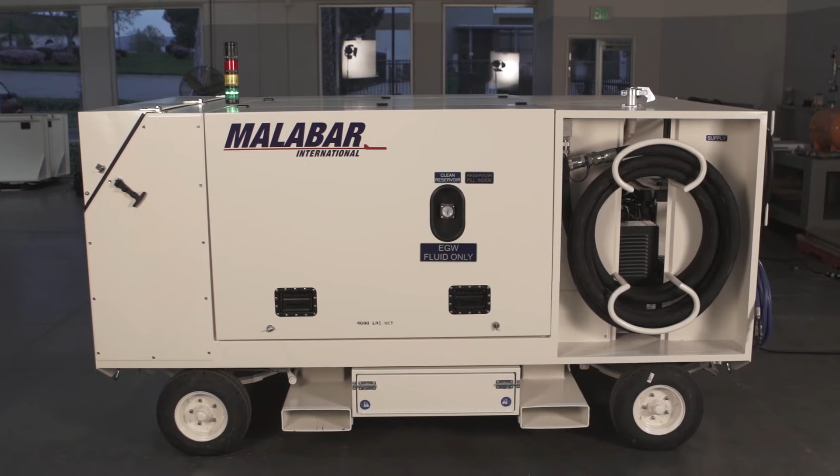My name is Lauren Card, Vice President of Sales and Customer Service. I'm here to present our operation, maintenance, and calibration training class for our Malabar coolant service cart for a 787 aircraft. The cart has various salient features and operating specifications that I'm going to briefly go through as a preamble

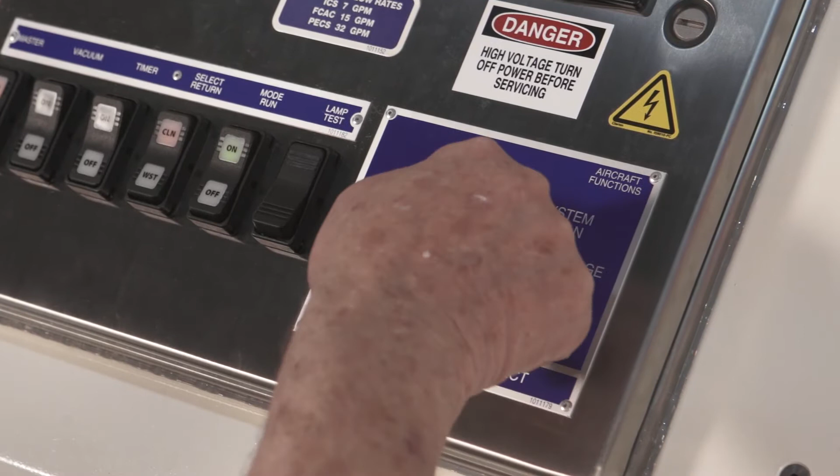to the course. The unit has an operating weight of approximately 4,600 pounds when it is fully serviced with coolant. The fluid that it uses is Boeing BMS 3-42 propylene glycol solution that includes an orange dye so you can see the visible fluid. The rated flow on the cart is up to 30 gallons a minute, and it's controlled with a variable control on the front of the cart, and we'll discuss that in a little while.

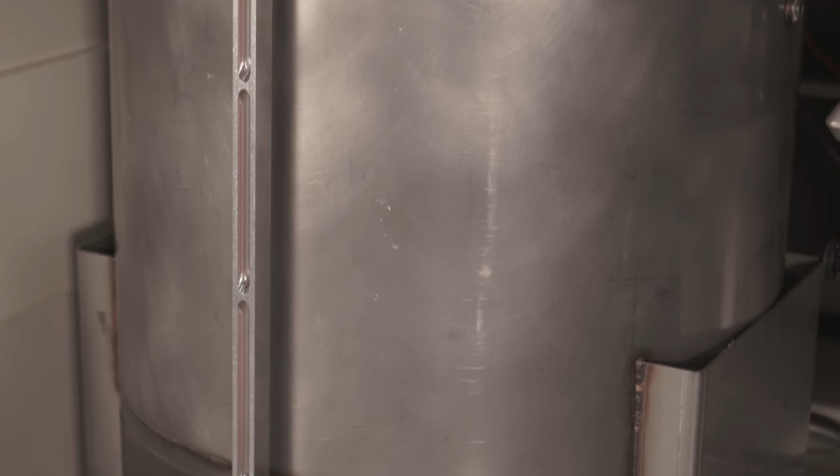The unit has an output pressure of up to 225 psi with a safety shutdown pressure of 230 psi. The unit has clean and waste reservoirs of 50 gallons each, and that is adequate enough to service the whole aircraft, which includes the power electronics cooling system, and also the integrated cooling system or ICS system, and the forward cargo air cooling system. It has supply and return filters to filter the fluid coming out to the aircraft and returning. The outlet is 3 micron absolute, and the return filter is 10 micron absolute.

The unit uses nitrogen as a source supply for purging the aircraft. After about 5,000 to 6,000 hours of operation, it's necessary to possibly purge the airplane, and we use low pressure nitrogen from a standard nitrogen bottle when that requirement occurs. Again, that's about 5,000 to 6,000 hours of operation.

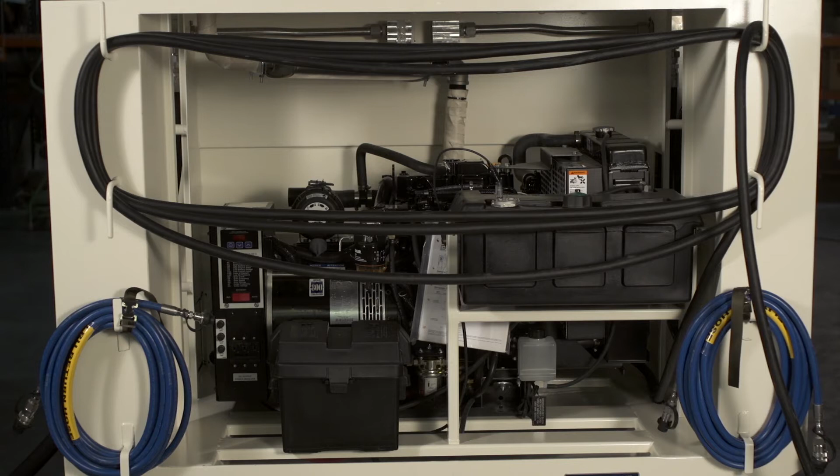The onboard generator provides electric power where you don't have shore power, say you're out on the ramp. The diesel generator has an 8-gallon fuel tank and is adequate for several hours of operation. The unit operates at down to minus 40 degrees Fahrenheit up to 130 degrees Fahrenheit.

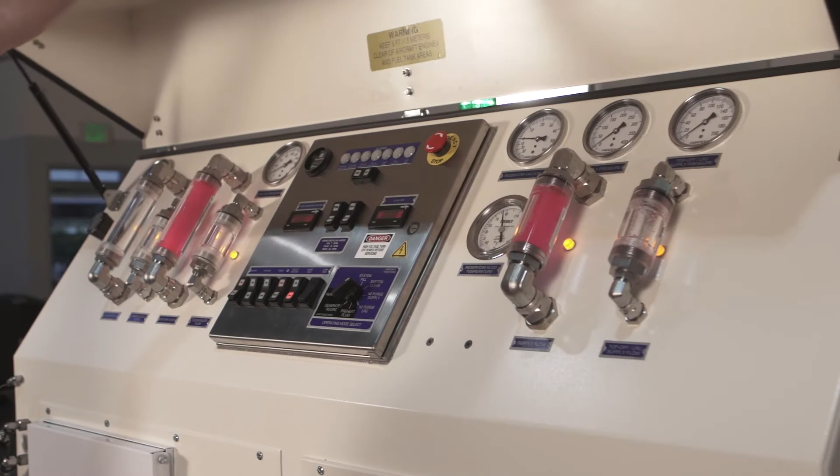Cart operators need to familiarize themselves with some of the possible safety hazards involved in operating the cart. One of them is a shock hazard. Because we're using high voltage electric power, you need to familiarize yourself with the safety features of the power panel. Make sure that you don't open the power panel with power on. You need to be aware of the plug on the end of the cable for plugging into the shore power, and the power generated from the diesel generator, again also high voltage 3-phase power.

Before performing any work on the cart, it's necessary that you turn off the power before you do any maintenance on the electrical system. The propylene glycol fluid itself could be considered hazardous. However, it is non-toxic, and it's something you want to avoid trying to ingest. There is a compressed gas issue because you're using high pressure nitrogen from a nitrogen bottle. So you want to be aware of the hazards involved with using high pressure nitrogen. It's necessary to have a static grounding reel and cable when the cart is operating on the aircraft to make sure that you bond the aircraft to the cart.

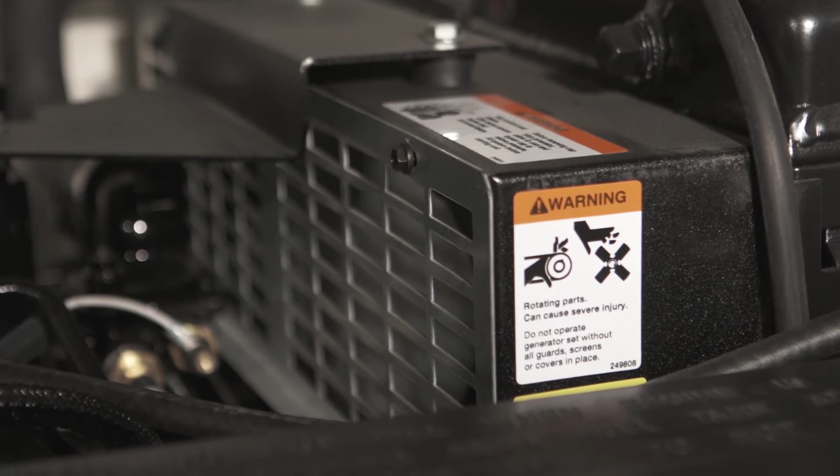There is a rotating equipment hazard because it does have a motor and pump system, although it is inside the cart. During operation of that equipment, of course, you can't access that, but you want to be careful with the connection between the motor and pump. Again, there's the pressure hazard from the fluid. Relatively low pressure, but be aware that you're using relatively medium pressure in servicing the aircraft. Again, up to around 225 psi.

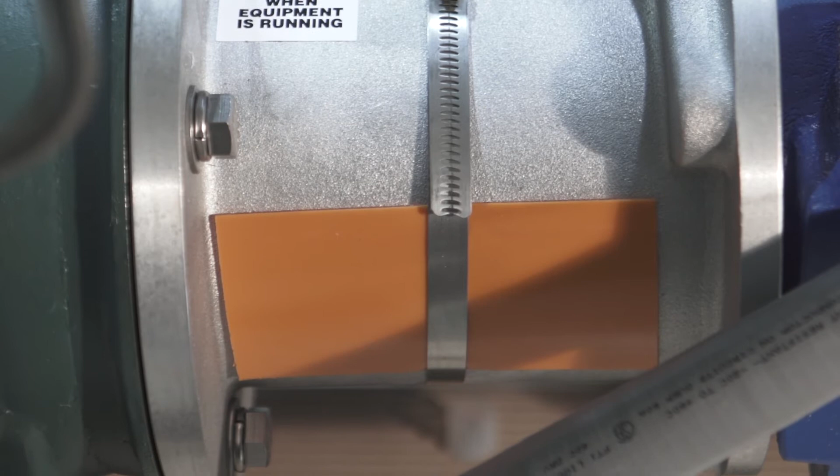There are various safety devices and guards to assist in keeping yourself away from hazardous areas. One of them is the coupling guard that's on the motor and pump. The other one is the fan guard that's on the diesel generator set. There's also a battery cover for starting the generator. There is the electrical disconnect switch that's on the power box in the front of the cart. There is an instrument panel latch, and also there's a pressure switch which you have access to in a maintenance type function.

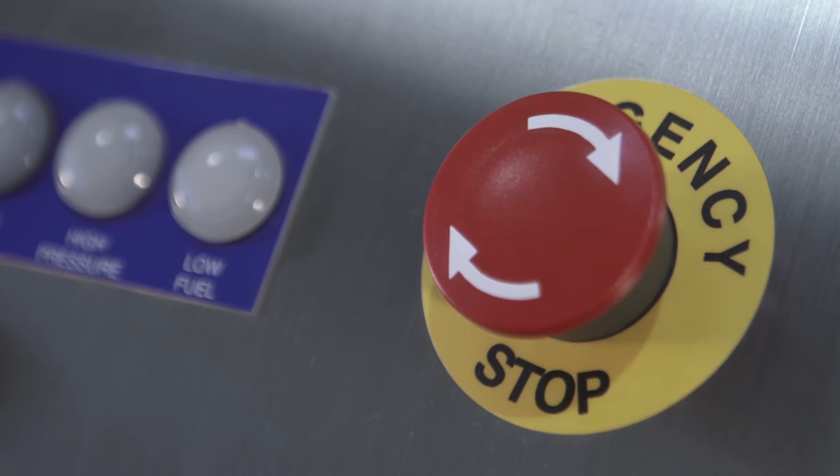There's also an emergency stop push button that is also on the panel in case there's an event so that you can immediately shut down the cart. Finally, there are relief valves in case you do have a pressure switch that malfunctions or any other system component malfunction. There are relief valves to protect the system, of course, as well as the aircraft. There are various warning labels that are fixed to the cart as a reminder of those areas that you should be aware of when you're working on the cart, especially in a maintenance function.

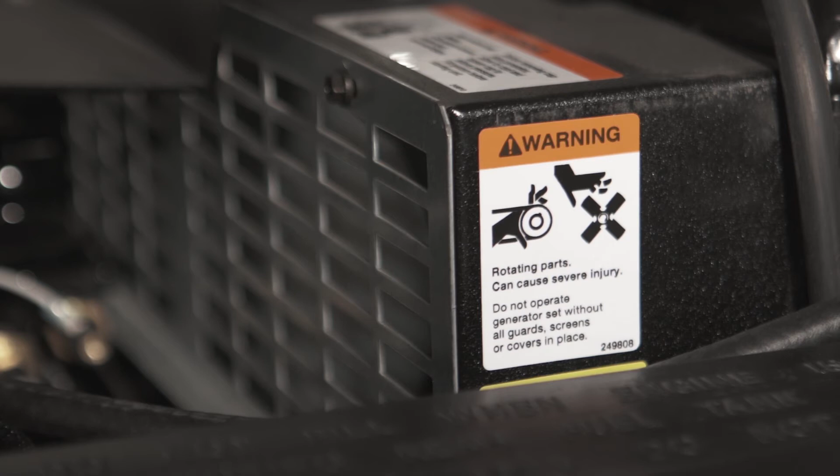Those include your electric hazard warning labels, which are on the front of the cart. There's also a warning label which is in the enclosure with the access panel open to keep the aircraft approximately 5 feet away from the cart, out of the envelope of the aircraft. Primary reason, of course, is the aircraft has fuel aboard and you need to keep the cart 5 feet out of that envelope due to the possible hazards involved with fuel.

Lastly, the generator, of course, has various warning labels, including hot gases from the exhaust, electrical power, of course, and rotating machinery, the fan, and the battery enclosure.

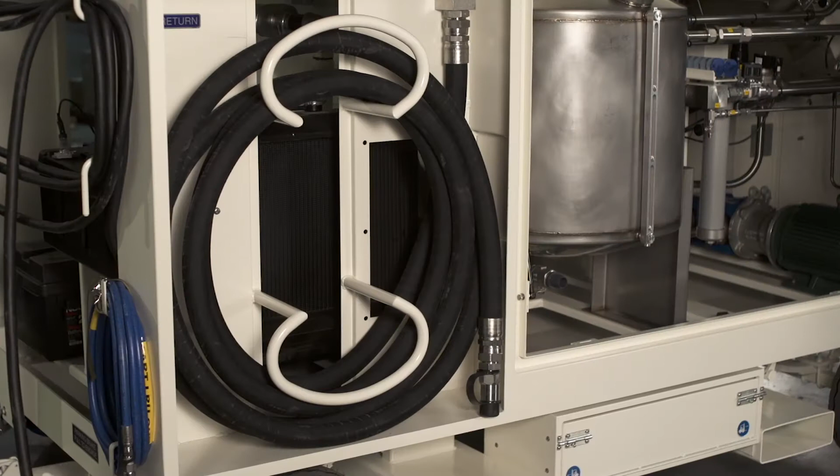Next, we want to talk about the system of operation on the cart and the various control features that are included in the cart. The cart is designed to fill, clean, deaerate, bleed, and evacuate the aircraft when it's time to change the fluid. The CSC cart is designed to fill, clean, deaerate, recirculate, and preheat the coolant fluid that's to be used on the 787. The various components are used in the cart to control these various functions.

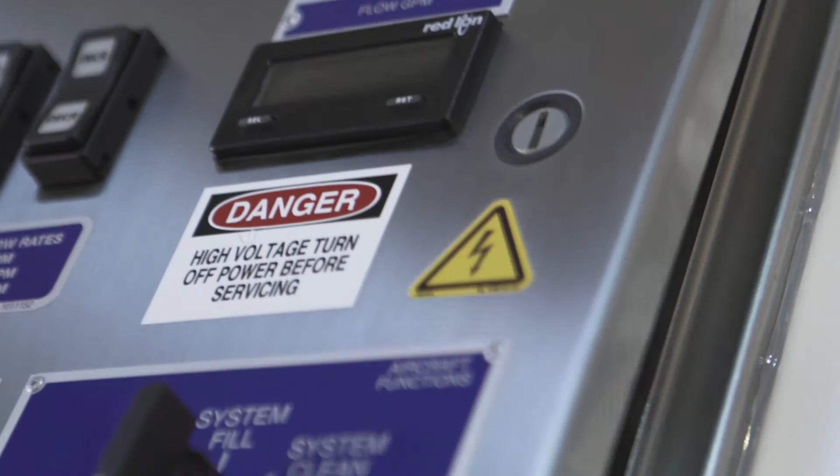The control panel provides the primary operator interface for the cart. Located at the rear of the cart, it has the electrical controls and displays mounted on the hinged door of the main control enclosure that houses a PLC, control relays, interconnection terminal blocks, and a low ambient temperature sensing and heating system for the electronics. The control enclosure is located in the center section of the panel.

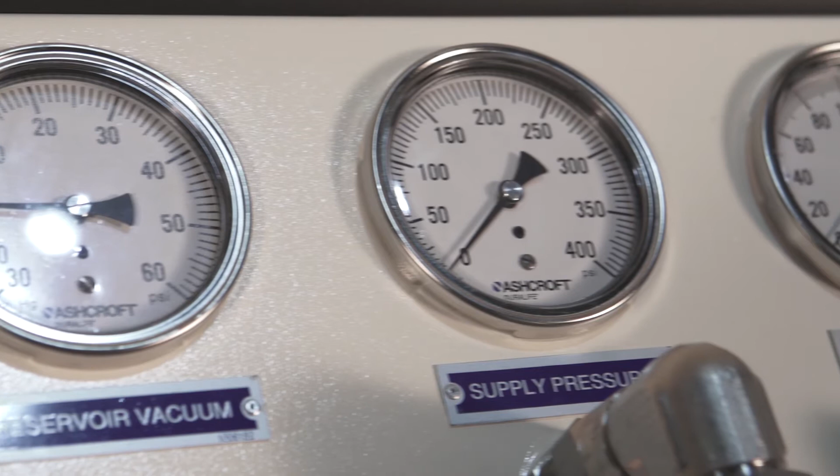Located on either side of the control enclosure are illuminated sight glasses for monitoring fluid aeration and purge, drain status, nitrogen regulator, fluid fill and purge control valve, and various vacuum, pressure, temperature, and flow meters.

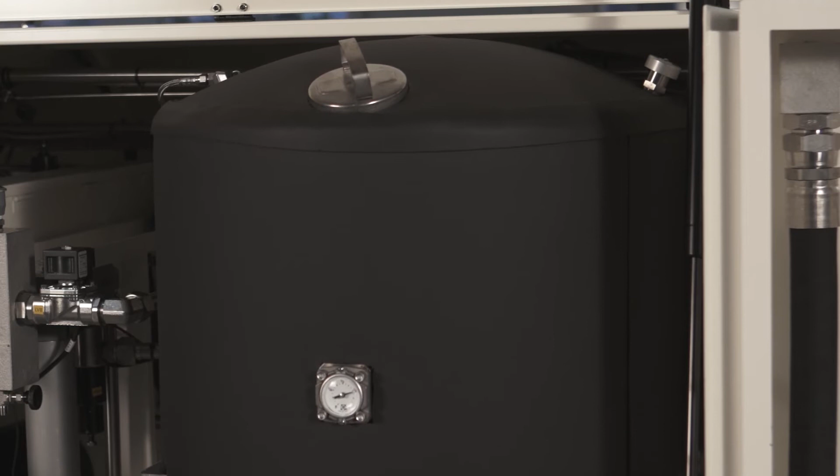The clean reservoir has a 50-gallon usable capacity and a stainless steel cylindrical tank equipped with a level gauge, Rochester type, a fill port and strainer cap, a drain valve, a pump suction isolation valve, a temperature sensor, vacuum and pressure relief valves, as well as a thermal blanket to keep the fluid warm and for storage, of course, of clean fluid.

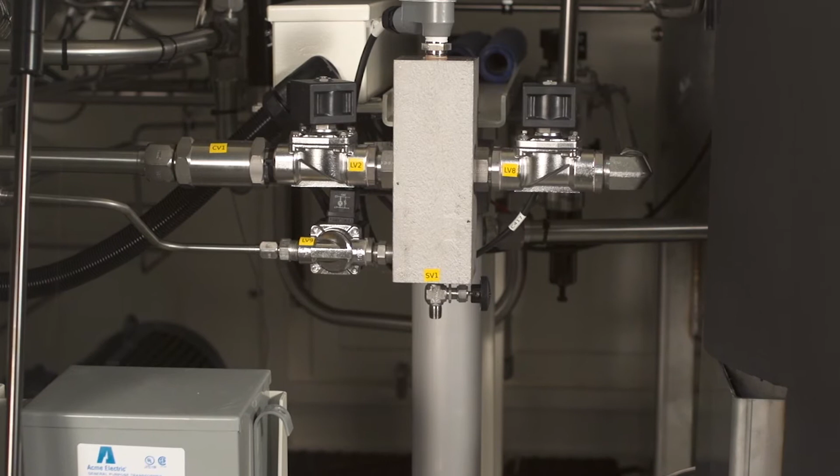The unit includes a supply filter and valve assemblies, which is on the supply side of the cart. It's a manifold system with a filter and valves on the pressure side with a fluid circuit designed to minimize fluid connections and piping. There's a 3-micron absolute non-bypass type filter with a differential pressure switch in the supply line downstream of the pump. All directional valves have stainless steel bodies, Viton seals, and are 24-volt DC solenoid operated. In addition, there's a solenoid valve in the manifold block labeled SV1 for sampling.

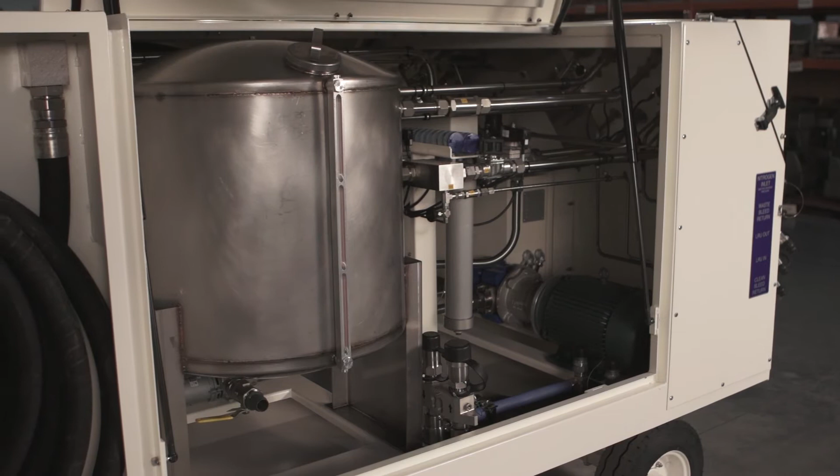The waste reservoir is a 50-gallon usable capacity stainless steel tank equipped with a level gauge, a fill port, strainer cap, drain valve, and center breather, which is provided for collection of fluid purge from the aircraft systems. The vacuum pump system consists of a 24-volt DC motor-driven vacuum pump, a trap, and a muffler with a vacuum regulator. These are provided to apply a vacuum to the reservoir for deaerating the fluid, preset at 3 inches of mercury.

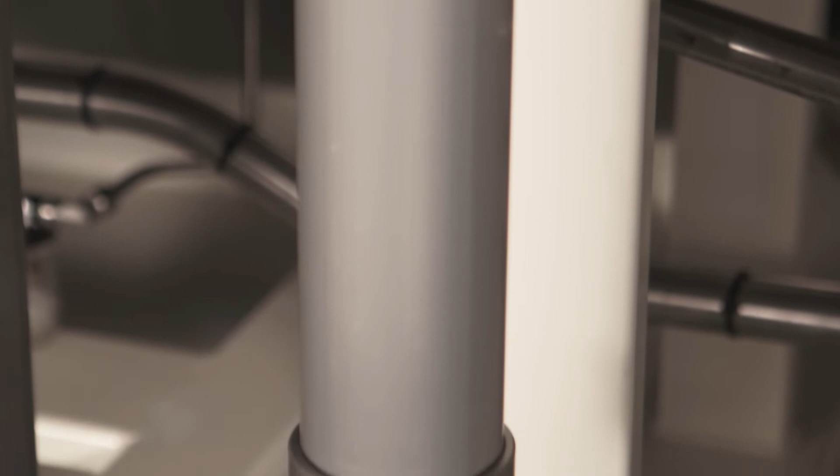The return filter and valve assemblies are manifolded on the return side of the fluid circuit, which are designed to minimize fluid connections and piping. There is a 10-micron absolute non-bypass type filter with a differential pressure switch in the return line. All directional valves have stainless steel bodies, Viton seals, and are 24-volt DC solenoid operated. There's also a sampling valve, SV2, for sampling the fluid returning from the aircraft.

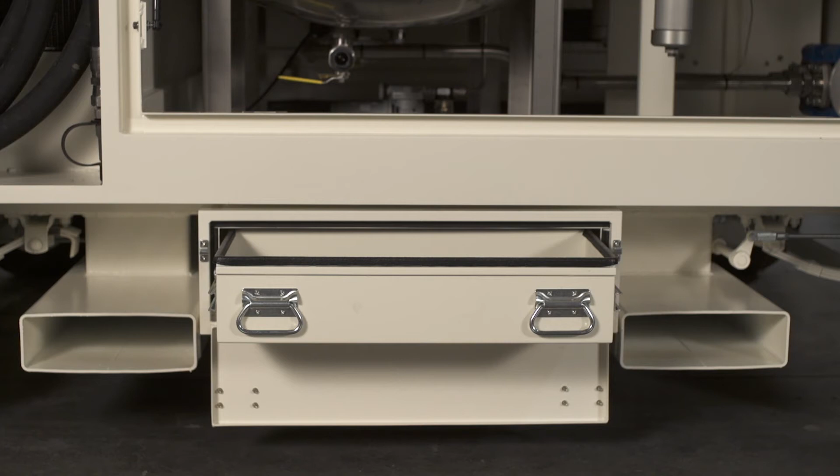A two-stage internal crescent-type gear pump is close coupled to a 10 horsepower, 208 to 240 volt, three-phase, 60 hertz motor. It's a NEMA C-face motor, totally enclosed, fan-cooled. There are two accessory storage boxes located underneath the main enclosure between the forklift pockets. The storage boxes provide storage for all the necessary adapter fittings, bleed hose, and accessories for interfacing the cart to the aircraft.

Supply and return hose assemblies include each a 30-foot long synthetic rubber-covered conductive hose with flush-type couplers and nipples installed at each end. The return hose includes a QD nipple, and the supply hose includes a QD coupling. This permits coupling of the supply hose to the return hose to allow operation in a runaround mode to precondition the cart fluid or flush the cart system.

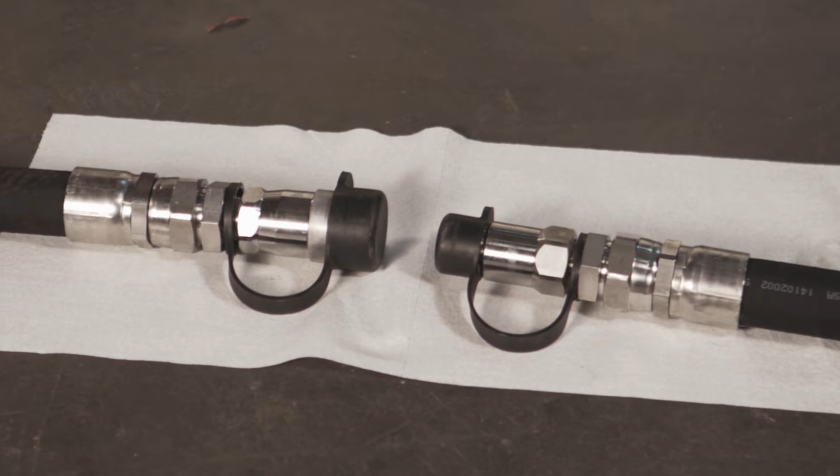Model 1011A has a diesel generator set for self-contained operation. The generator includes an 8-gallon fuel tank located just above the engine. The fuel gauge is located in the top of the tank. The unit includes top-off LRU, which stands for Line Replaceable Unit, supply and return hose assemblies.

These are 30-foot long, 3/8 synthetic covered conductive hoses with Parker flush face couplers and nipples. There is a supply and return hose, and they are located as shown in the front of the cart next to the tow bar.

There is a 100-foot cable. The rack is located just above the generator and is designed to store the cable, and mates with a facility power receptacle. The receptacle is provided by the customer. The static ground rail is used to bond the cart to the aircraft grounding system during servicing.

The coolant service cart is designed to service various cooling systems on the Boeing 787 aircraft. The system circulates BMS 3-42 coolant through the systems, filters it, deaerates it, and drains it. The cart can also be used to service individual aircraft system LRUs.

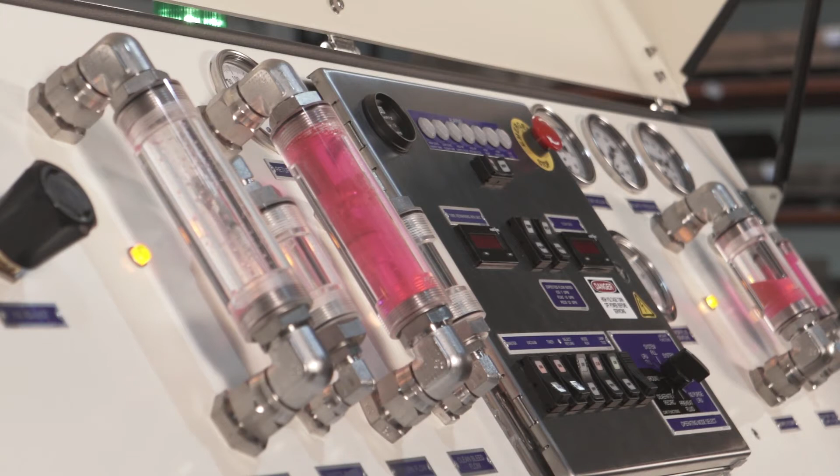The CSC unit uses a two-stage internal gear pump driven by a 10-horsepower electric motor to circulate coolant through the cart and the aircraft cooling systems. The unit is powered by a line cord or a water-cooled diesel generator. The pump draws coolant from a 50-gallon clean reservoir and sends it through a 3-micron supply filter.

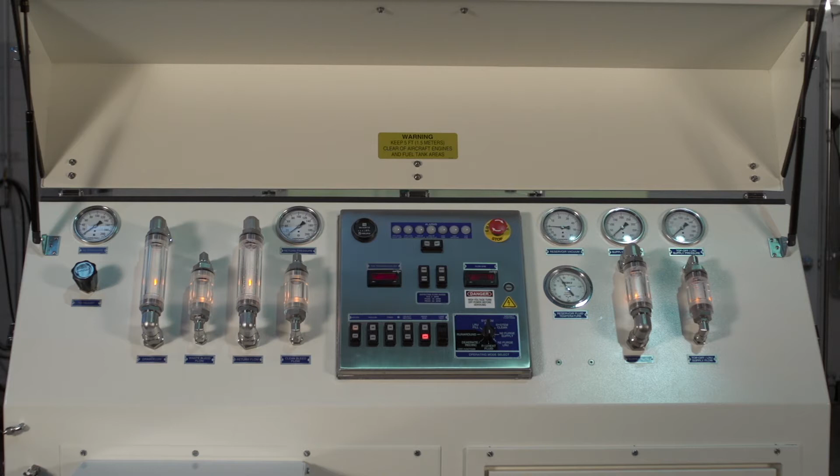From the filter, the coolant flow is directed by a selection of solenoid valves based on the aircraft subsystem being serviced and/or cart mode of operation: through a flow meter, sight glass, and main supply hose to the aircraft or return hose in the runaround mode, or through LRU sight glasses, LRU supply hose, through a recirculate solenoid valve to the return line, or the pump relief valve in a preheat mode bypassing the filter.

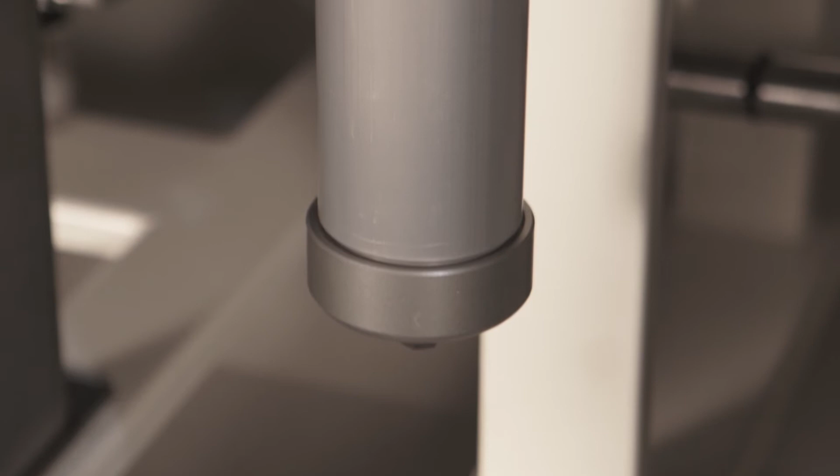Coolant returning from the aircraft system re-enters the cart through the return hose. Solenoid valves direct the fluid to either the clean or waste reservoir. Sight glasses monitor fluid condition in each circuit. The flow path to the clean reservoir also includes a 10-micron return filter.

A complete set of adapter fittings is provided for connection of the hoses to the appropriate points on the aircraft. The entire coolant loop is protected from overpressure by factory preset relief valves and a pressure switch.

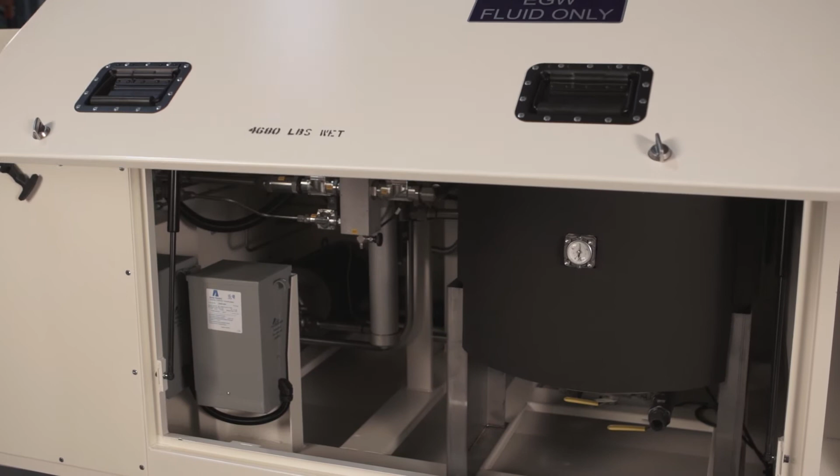The clean reservoir on the cart is connected to a 24-volt DC vacuum pump and vacuum regulator that will maintain a vacuum on the clean reservoir to deaerate the coolant. This regulator is factory set at 3 inches mercury vacuum. The vacuum pump is controlled by setting the vacuum regulator located above the clean reservoir.

CSC operation is controlled by an Allen Bradley Programmable Logic Controller, PLC, in conjunction with a variable frequency drive, or VFD, relays, selector switches, sensors, and other devices. By controlling the VFD pump motor speed and numerous solenoid valves, the PLC controls the flow of coolant through the CSC and the aircraft.

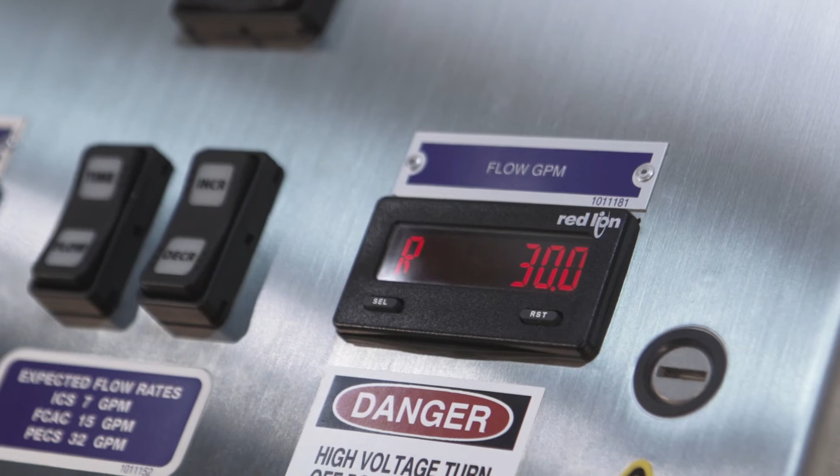For each position of the mode selector switch, the PLC system is pre-programmed with the required flow rate, or motor speed, and valve configuration. The PLC system also monitors fluid levels in the 2 reservoirs, fluid temperature, and filter differential pressures.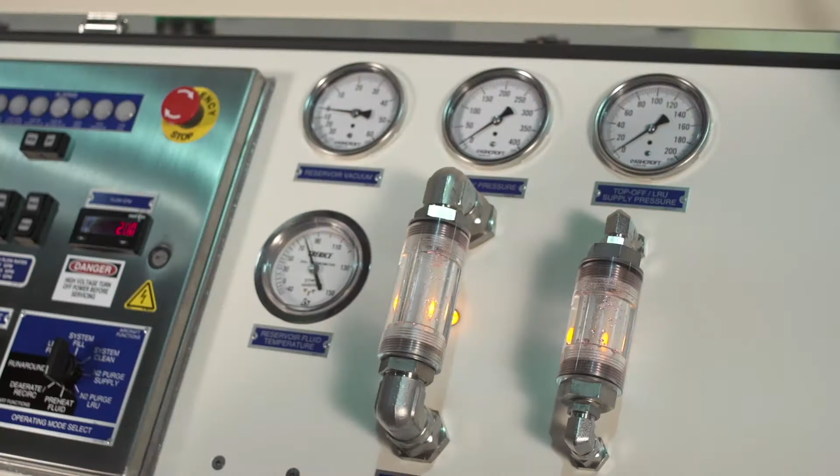The flow sights are panel mounted and illuminated. One is located upstream of the flow meter in the supply line, one in the return flow line to the clean reservoir, one in the drain line to the waste reservoir, one in the clean bleed return line to the clean reservoir, one in the waste return line to the waste reservoir, and one in the top-off LRU, or line replaceable unit, supply line.

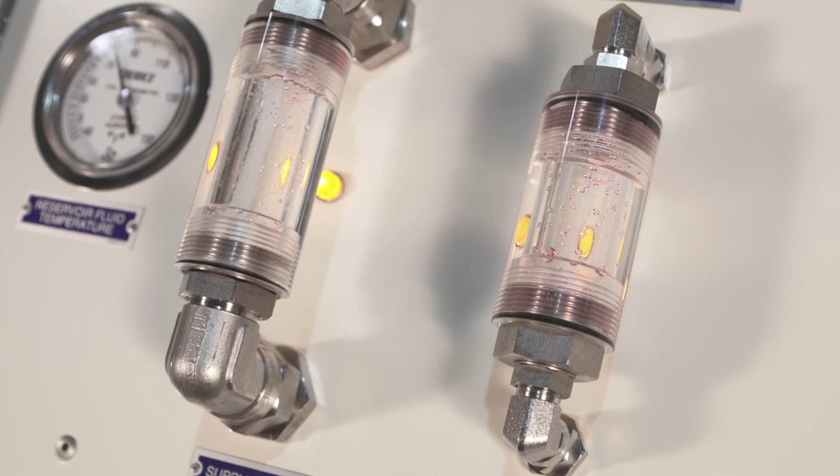A status beacon and audible alarm is provided on the top of the cart. The green, yellow, red stack beacon is located above the control panel to indicate unit status. Green is power on, flashing yellow is caution operating, flashing red is unacknowledged alarm, and steady red is acknowledged alarm. An audible alarm located in the top of the stack will sound when an alarm occurs, silenced from the operator panel.

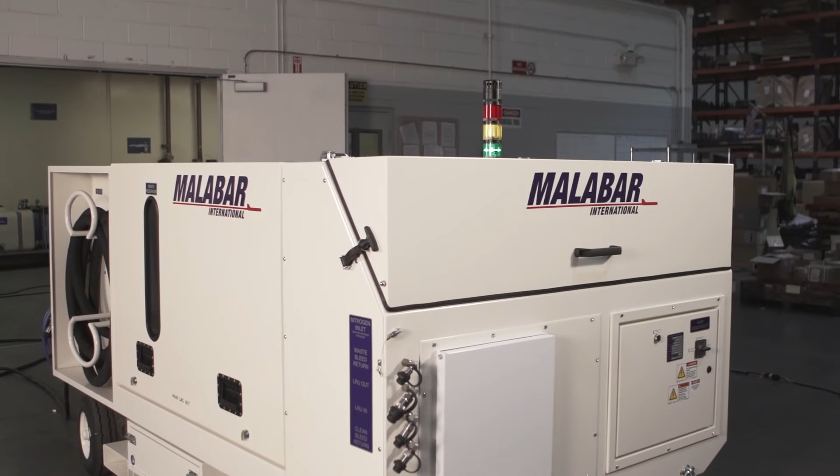The main power disconnect switch is located on the electrical enclosure below the power panel. The power panel houses the main disconnect switch for all 1010A and 1011A models. In there is the variable speed pump drive, a 24-volt DC power supply, and a low ambient temperature sensing and heating system for the electronics. LRU out and in connections are on the corner of the cart.

The nitrogen purge system is located on the front panel and includes the nitrogen pressure gauge, nitrogen regulator, and the nitrogen connection. The nitrogen connection will withstand up to 3,500 psi nitrogen inlet, and the regulator will regulate it down to 100 psi.

The CSC cart must be properly located before operation. The cart should be located so that the power cable can be readily connected to the facility power outlet in the electric mode, and the supply and return hoses can be readily connected to the appropriate points on the aircraft, or in this case in the runaround mode for initial operation. The CSC cart must never be located within 5 feet of the aircraft envelope.

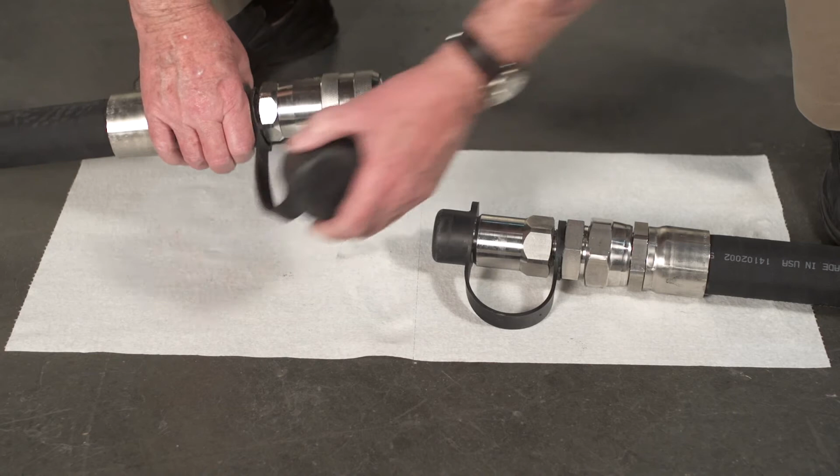Before operating the CSC, the supply and return hoses must be fully removed from the cart and uncoiled. The hoses are 30-foot long synthetic rubber covered conductive hose. The supply hose has a female quick disconnect coupler on it, and the return hose has a male quick disconnect nipple. Prior to operation of the cart, the hoses must be connected in the runaround mode. Never at any time should the hoses be disconnected in an attempt to run the cart, because you'll trap pressure in the hoses, which will make it very difficult to connect.

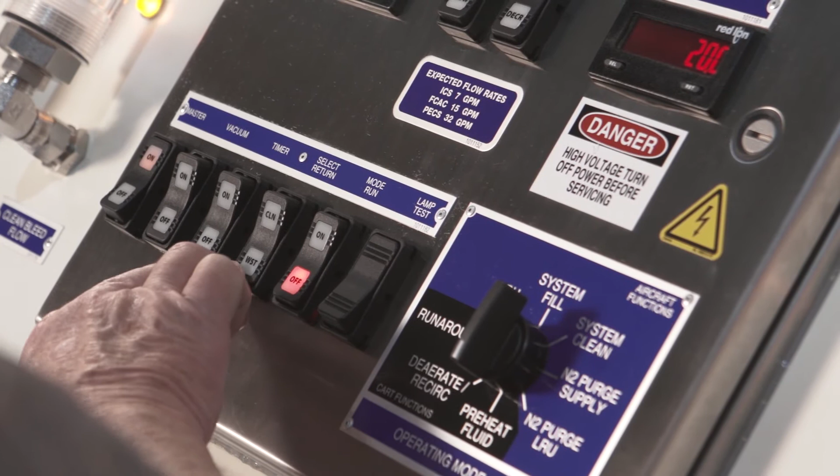The CSC cart is controlled by 8 modes of operation. In addition, you have flow rate adjustments and timer countdown adjustments on the panel. You also have a lamp test, and you have on-off switches for the master, vacuum on-off, timer on-off, waste or return select, mode run or mode off.

In the preheat mode, the default setting is 20 gallons per minute. In the de-aerate mode, the default setting is 30 gallons per minute. In the runaround, it's also 30 gallons. Remember, runaround is with the hoses connected. LRU fill is at very low flow because the components are relatively small, and the LRU flow goes through the LRU supply fluid flow sight.

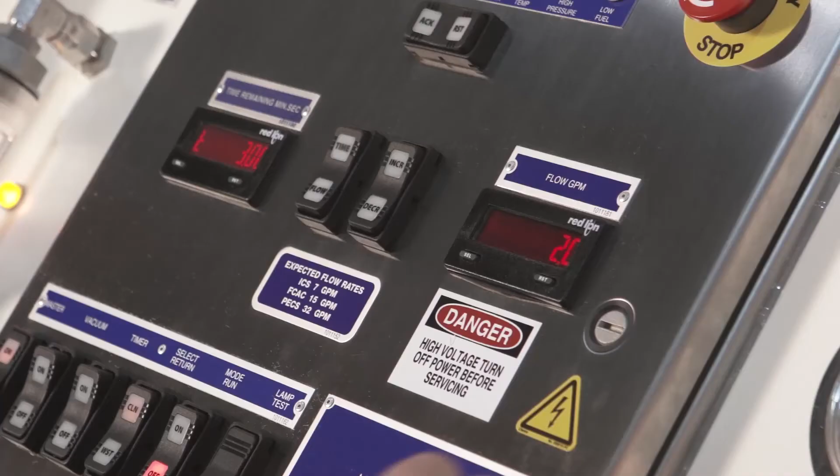System fill, default setting is 4 gallons a minute. Not any higher for an empty airplane, because you don't want to water hammer the system with a high flow rate with an initial fill. System clean, default setting is 7 gallons per minute. For the ICS, a placard on the panel displays the different recommended flow rates: ICS 7 GPM, FCAC 15 GPM, and PECS 32 GPM maximum. We'll adjust those flow rates to describe how that works in a minute.

We also have N2 purge. There is no flow rate here, and that basically directs the nitrogen inlet through the supply hose out to the aircraft and back in to empty the aircraft into the waste tank. It's already pre-selected in waste, and you can't go back to clean. That's so you don't contaminate your clean tank. You also have N2 purge if you want to purge an LRU, again to empty an LRU to send it back to the manufacturer for repair or warranty action.

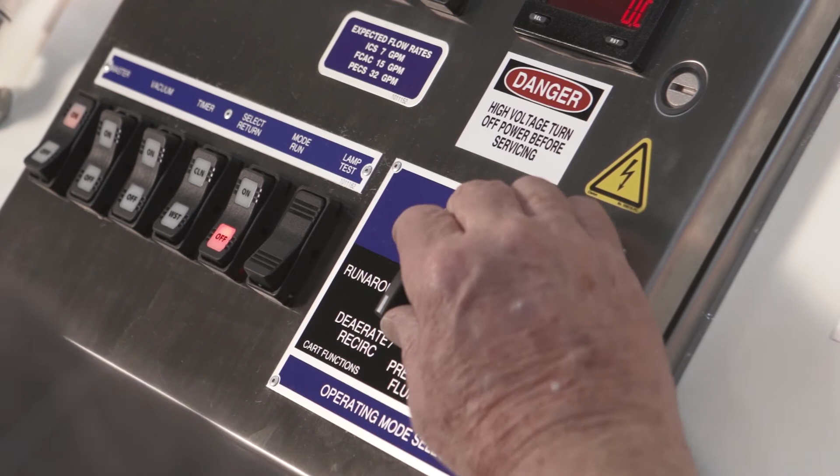So we're going to start with a normal operation. Say you're in a temperature environment below 65 degrees Fahrenheit. So you go to the preheat mode, selected at 20 gallons per minute. However, if temperature in the reservoir is below 30 degrees, you don't want to go any faster than 20. If it's above 50, you can go up to 25 GPM, and you can adjust it by hitting the flow and increase, and you can increase the flow to whatever set point you want. I'm going to stop at around 25.

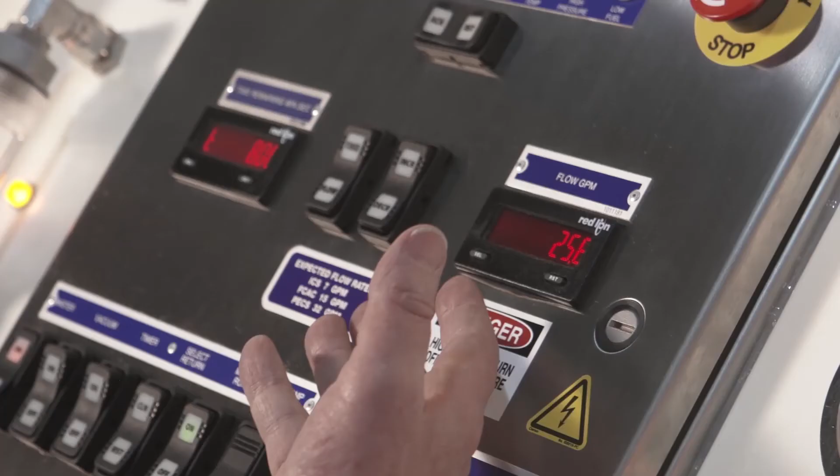So I'm going to start this to demonstrate the noise level in the preheat mode. The preheat mode actually is heating the fluid going over one of the system relief valves. We hit start. The motor ramps up through the VFD and is actually running that fluid from the clean reservoir back into the clean reservoir to heat the fluid in the clean reservoir. And you monitor your temperature right here in your reservoir.

It raises about a degree per minute at about 25 to 30 gallons a minute. So that's one operation for preheating the fluid, again, when the fluid is below 65 degrees Fahrenheit. So we can hit off and stop that mode.

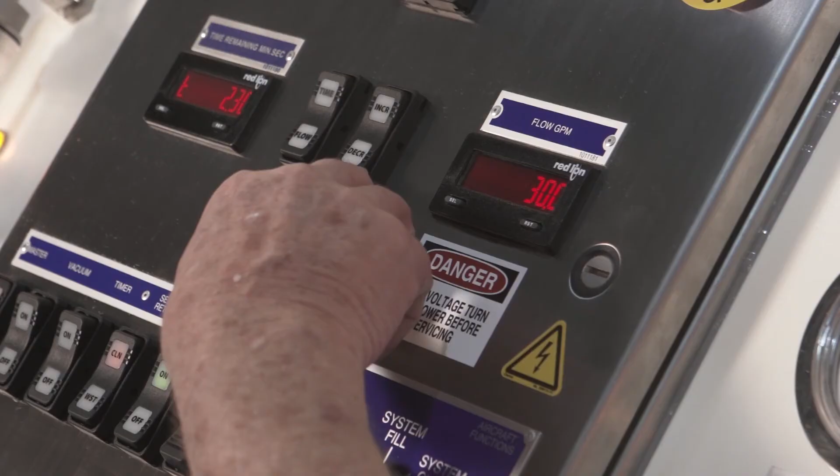Now, if we want to recirculate the fluid, this is more of a maintenance function within the cart. I haven't run any fluid in the hoses yet. I'm going to go ahead and start it at 30 gallons. And again, it's recirculating in the clean tank, which is the normal default setting. That's internal. You're not going to see any flow rates here or anything like that because you're bypassing the turbine flow meter. It's more of a maintenance function to see that everything's operating properly without the hoses in the circuit.

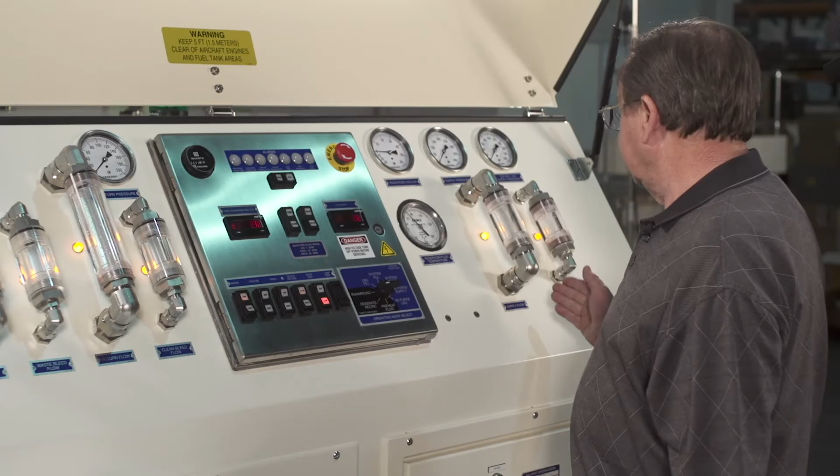Now we'll demonstrate runaround. In this case, you'll actually see fluid coming out of the supply line back into the return line. So in the runaround mode, again, we start with a flow rate starting at 30 gallons a minute, and we start seeing fluid go through the supply sight gauge here, and then coming back through the return flow.

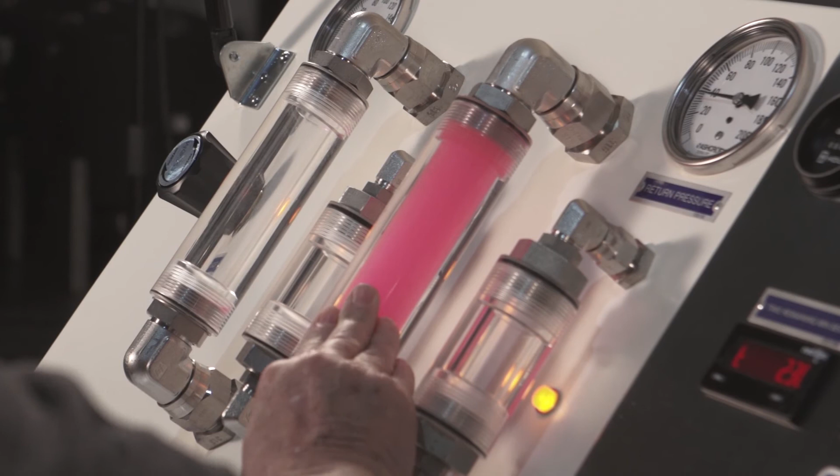Now what we want to monitor is any air that might be in the hoses. So you'll see a lot of bubbles in here in the return flow sight because those hoses were empty in this particular case. And you can see it's very cloudy. So to assist in deaerating that flow rate, getting the air out of that return flow, you turn on the vacuum pump, and that'll assist in deaerating the fluid faster.

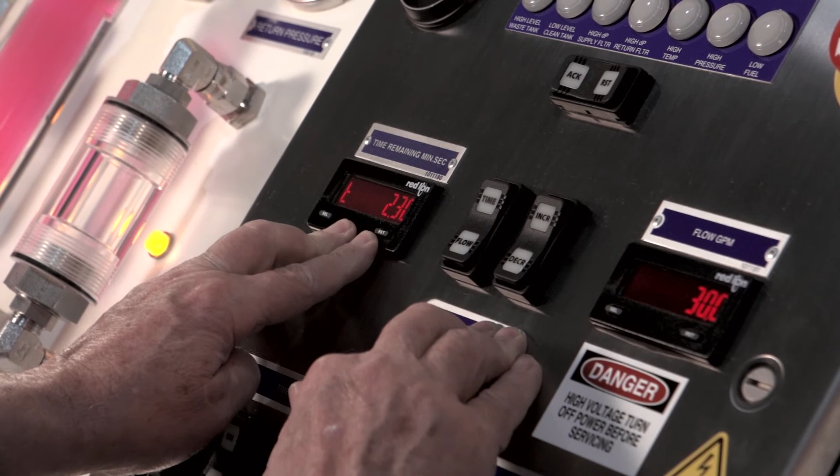The cart has a timer function that allows it to count down automatically and shut off. I'm going to adjust the time from the default setting of 2.3 minutes by holding down on the time button and the decrease button. Now you notice I'm doing this on the run, which is perfectly okay. I'm just going to shut it down a little quicker.

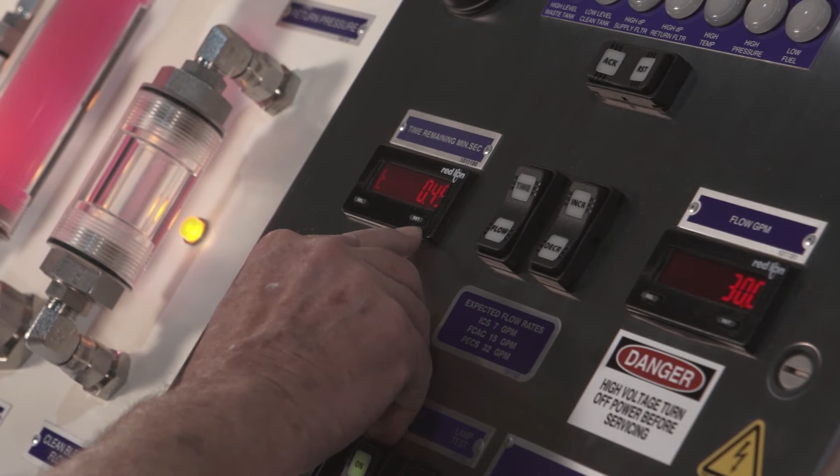Okay, now I'm going to turn the timer on, and you can see after 0.50 minutes it's timing down. Now once this times out to 0, it will automatically shut off. Now there's an important function to understand about this timer, and I'm going to demonstrate it in a minute. 8, 7, 6, 5, 4, 3, 2, 1, 0. Shut down.

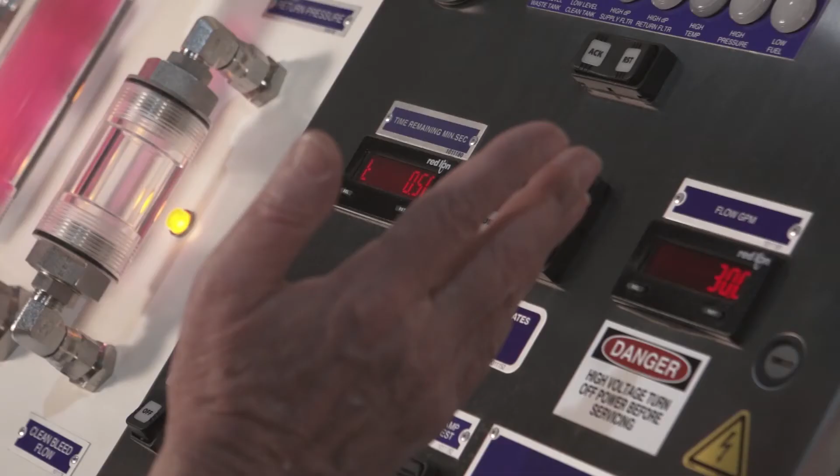Now there's an important function about this. You notice the timer is flashing. Okay? I'm going to try and restart this, and you notice it won't start. No matter how I try, it will not start because the timer is set at 0. So what we want to do is turn the timer off, then we can start it with the timer off. And if I turn the timer back on again, it'll count down again. So that's how the timer works.

If you want to process an airplane and you want to go have a sandwich or a cup of coffee and you want to set it up for maybe 5 or 10 minutes of operation to clean out an aircraft and deaerate it, you have that opportunity. It'll shut down automatically. So we've demonstrated runaround, and we've got the air out of the hoses by operating it for a few minutes. It doesn't take much time.

And now I want to demonstrate system fill at a lower flow rate. Now we're going to simulate that the hoses are connected to the aircraft. Now I'm going to demonstrate from runaround to system fill. And the default setting is 4 gallons. Now, before I start, if I want to go a little bit faster, I hit on the flow setting, on the rate, and I can increase it from 4, and you notice it starts counting up. 5.7, 6.7. You wouldn't want to go any faster than that.

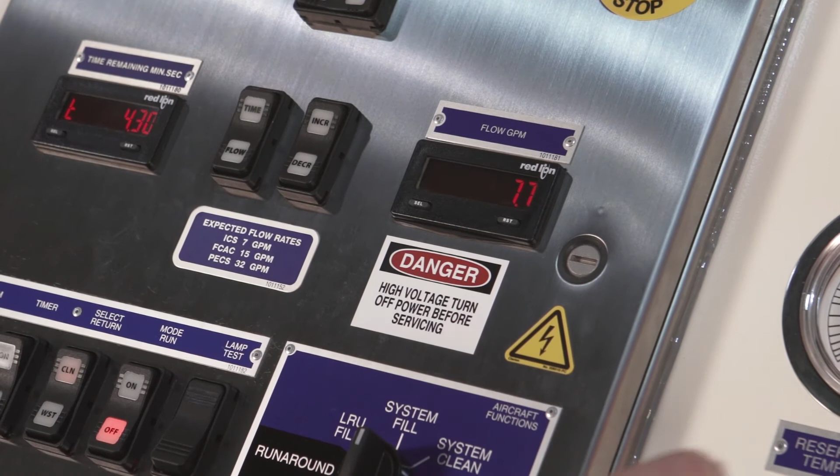I'm just showing you how you can adjust it, and then we'll start, and I'll show you how you can decrease it. So I hit on, and it's not going to make much noise because it's going a relatively low flow rate. So now I'm going to put on the flow set point and hit decrease, and you notice it's going back down again. So you can adjust the flow rate, operator, however you want to do it. So that's back to close to default setting.

System fill is always about the same no matter what system you're filling on the aircraft, with the exception of LRU, which is line replaceable units. The next set point default, and you notice it goes off. The next one is 7, so I turn it on again. Now it's going to start, and it's going to feed back that 7 gallons, and it's actually running at about 7.3, 7.2. It'll hunt back in as it feeds back from the turbine flow meter.

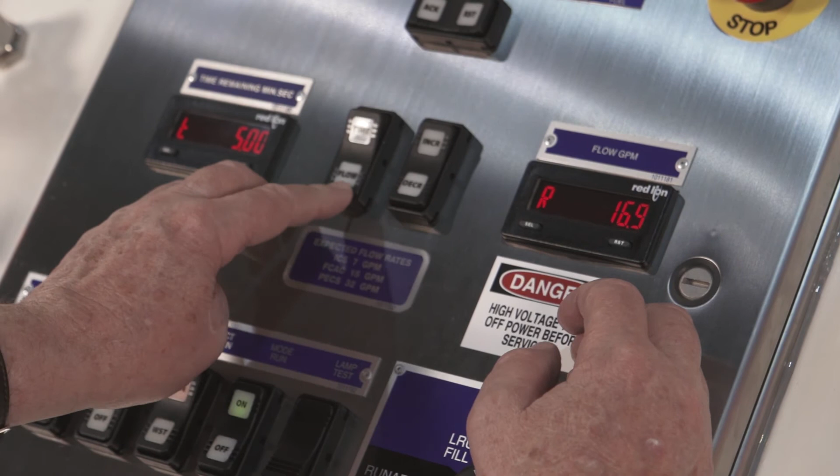So I'm going to hit flow again, rate, and that's ICS. Now I want to change that to FCAC, which is your forward cargo air cooling, which is preset at 15 gallons, and you can hear the noise increase. So it's at 16.9. I want to change that. I'm going to go down. I overshot. You can adjust it back down again. So that's the set point that's recommended for FCAC.

Now, if I want to increase the flow rate for your bigger systems, your power electronic cooling systems or PEC systems, again hit flow and increase it. And the longer you hold it down, the faster it increases by a gallon.

So there's 29.8. Again, we're simulating that we're cleaning the system or de-aerating the system because we don't have the hoses, in this case, connected to the aircraft, which is not standard. But anyway, you have to demonstrate it, so you need to connect the hoses together for this demonstration.

We also have alarms that indicate various functions on the cart. I've induced a fault with a low fuel indication, and we'll talk about clearing that in a minute. But you have high level waste tank, you'll get an alarm and a shutdown if the waste tank is too full. You have a low level clean tank, which means you don't have enough fluid in your clean tank, and it will be a shutdown until you put more fluid in the clean tank.

You have high delta P across your supply filter. Remember, that's on this side. And then you have high delta P on your return filter. That differential pressure is actually 25 psid. That's the set point where you get an alarm. It's not a shutdown, it's a warning that it's time to change the filter element. You have a high temperature alarm. It's not a shutdown, it's a warning. You need to stop and cool it down by recirculating.

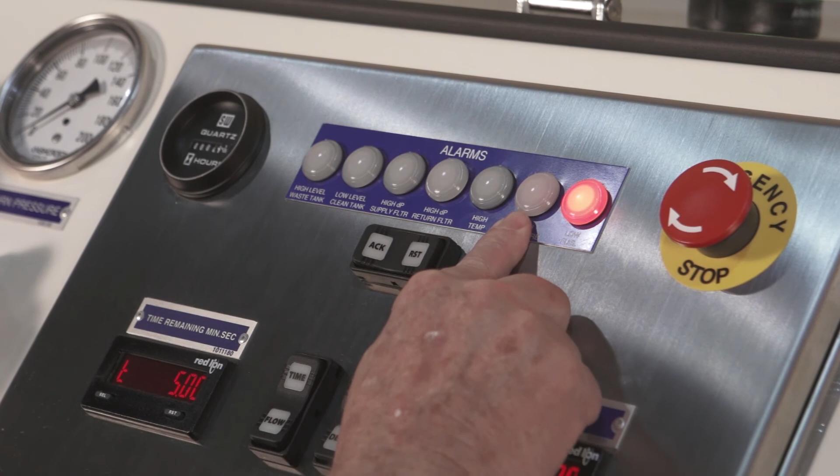You have a high pressure shutdown warning. That's if the pressure goes over the set pressure switch setting of 230 psi, and that's a shutdown, and you'll have to clear that high pressure. In the case of a low fuel, you're going to get this action here. I can actually run the cart. I can still run the cart, but it's a warning, okay, on the electric side.

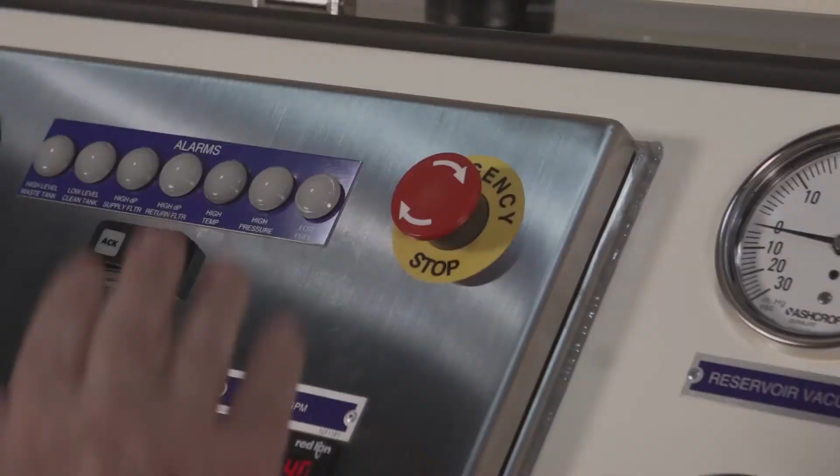Now, to clear this alarm, I've acknowledged, I'm going to try and reset it. It won't reset. We still show the alarm, but I have to reset it. I'll acknowledge it, and I hit, oh, the alarm is clear. Reset. We have an emergency stop push button. If there's any time that something goes wrong and you want to stop the operation, you hit that emergency stop. Everything shuts down. The way you reset the stop, the way the arrow shows, you go like this, and it resets. But you notice that the master switch is still flashing, indicating you're going to have to reset it before you can start it again. So that's how the emergency stop button works.

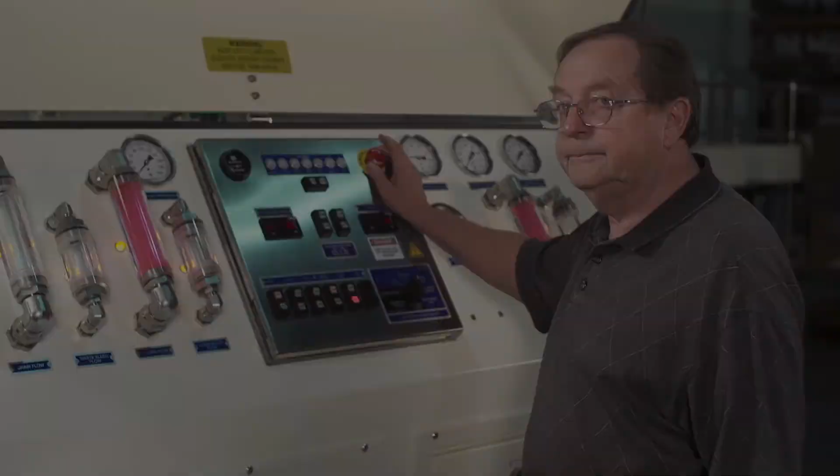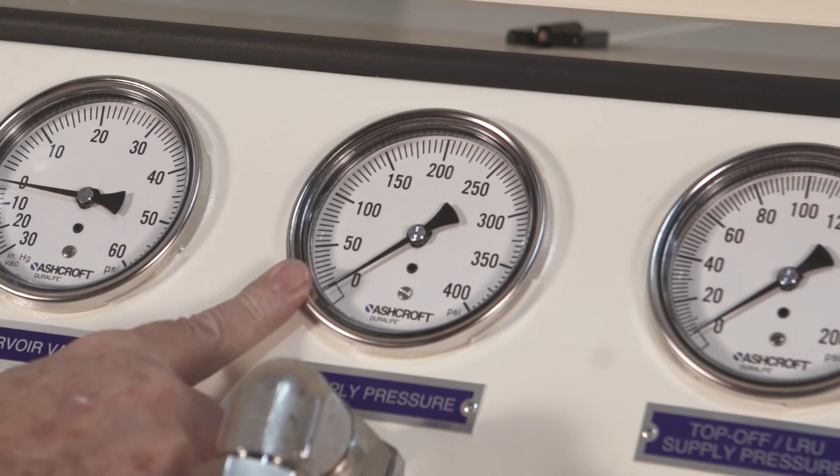You also have an hour meter on the panel. This tells you how many hours you run with the motor running, not with it on, but with the motor running. As I said, we've seen the generator in the back, but there is a generator control panel, and I'll point that out in a minute. You have your temperature gauge, your return pressure gauge, your supply pressure gauge, and then your vacuum gauge, and then your top-off LRU supply pressure gauge. Your flow sights are all listed right here, and we'll demonstrate a purge so you see how that works in conjunction with the N2 purge supply and N2 LRU purge.

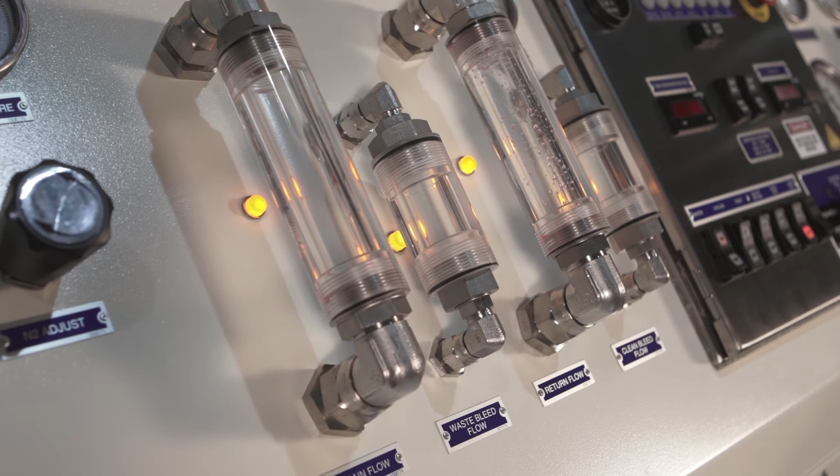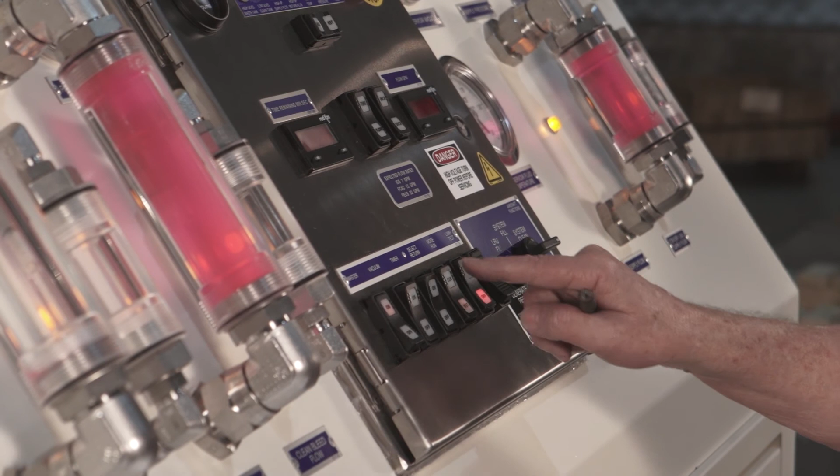We're going to simulate purging the aircraft using nitrogen. We have a connection here with nitrogen, and we have the N2 supply pressure mode select switch, what we're going to use to purge the aircraft with nitrogen back into the waste tank. Now if I go to N2 purge on the supply, you notice the light comes on in waste, not clean. There's jumper lockout wires in here that don't allow you to go back to clean. We'll discuss those wires in the preventive maintenance section a little bit later, but suffice it to say the default setting always goes to waste because you don't want to contaminate your clean reservoir with waste fluid coming from the aircraft.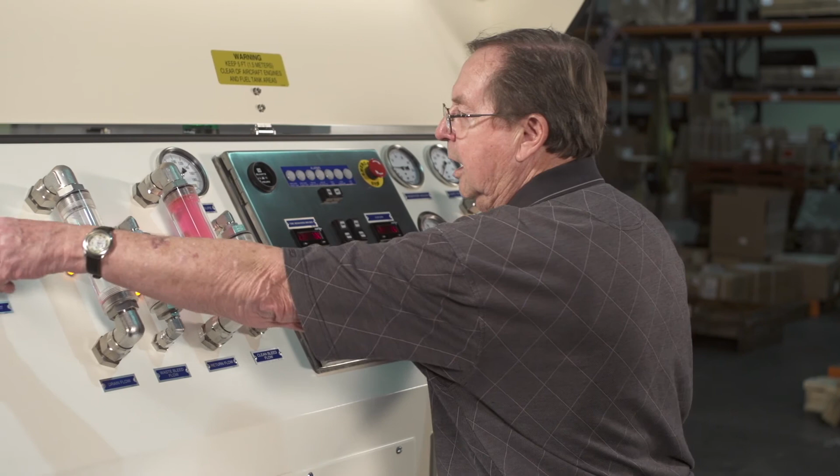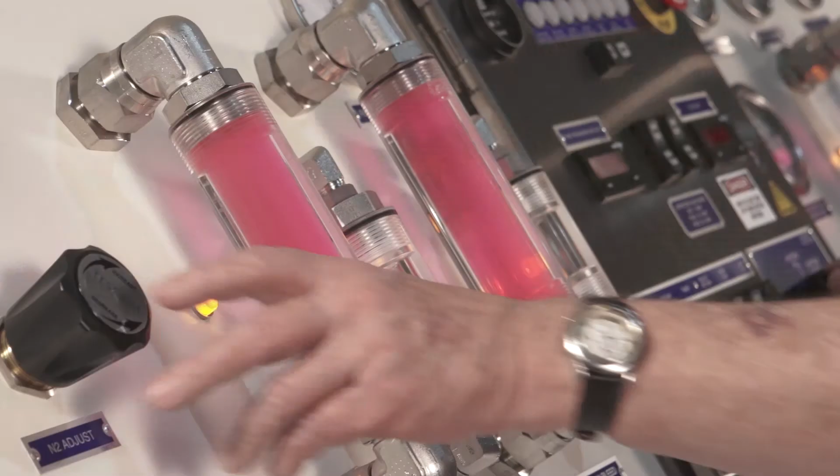So I have nitrogen supply selected. I have nitrogen on the cart. I'm going to move it up to a starting pressure of about 50 psi nitrogen. So that's where you want to start. So then I can go ahead and start. Your flow meter is not going to do anything. Your timer, what you're looking for is to get the fluid out of this line. So I'm going to turn that on. And what that's going to do, that's going to push that fluid out of the hoses, and it's going to come back into the waste tank.

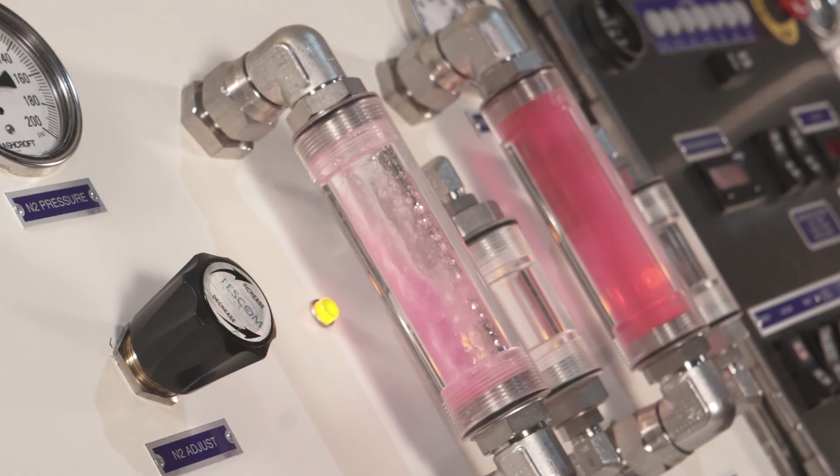So that illustrates how you use nitrogen to purge the aircraft. Again, we're in a simulated mode right now with the hoses, but as soon as this runs clear, you've cleared the aircraft of fluid. And we'll let it do that. You're never going to get it all out of these glasses, but the hoses are clear. So that's how you purge your main systems on your aircraft going through the N2 purge supply. And again, by shutting it off, you shut it down, and you're finished. So that illustrates your N2 purge on supply.

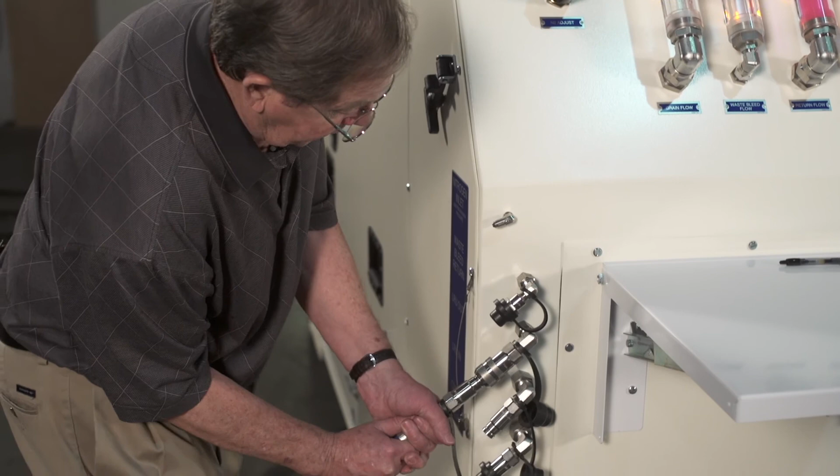So we're going to demonstrate filling an LRU. And I'm going to demonstrate that by going in the LRU out connection here on the cart and coming back in the LRU in connection by coupling these hoses together. This simulates going out to an LRU and back using one hose for this simulation.

And I go over here to LRU fill. The preset is 2 gallons per minute. You don't want to go much higher than that because you got a small hose and you have a component that won't take a lot of flow rate in filling. So now I'm going to start.

Notice I'm in the clean again, default. I want to be in the clean mode as a default because I don't want to waste any fluid coming back, especially when an LRU is empty and it's clean, it's ready to fill it. But that is the default setting. I can demonstrate that again by going back, and that's the clean setting. So now we're going to start, and we're going to fill this up, okay?

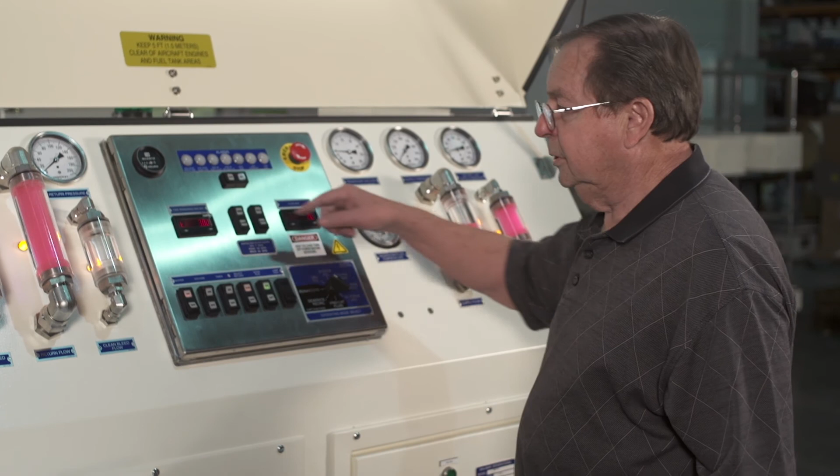And it's going very slow. Now it's getting the air, return flow, it's getting the air out of that hose. You notice this is your return, very small hose, so it's going to get the air out pretty quickly. Now I can adjust it a little bit by, again, going to the flow and increasing it. I'll go to 3. It won't let you go much more than 4. So that's 3 gallons a minute.

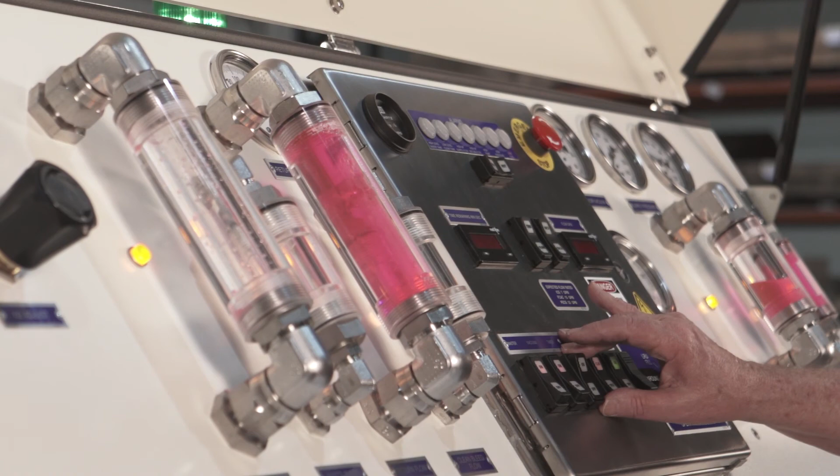Again, by operating the vacuum pump, that will assist because it's going back into your clean tank. The vacuum pump provides assist for doing that. Okay, now at this juncture, I'm going to stop. It's relatively full. So now we're stopping at LRU fill. Now, by the same token, if I want to purge that, like I've purged the aircraft, I can go into N2 purge.

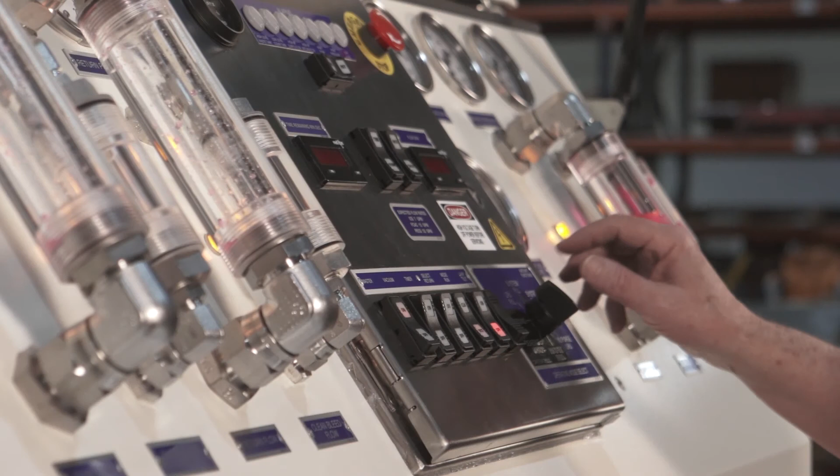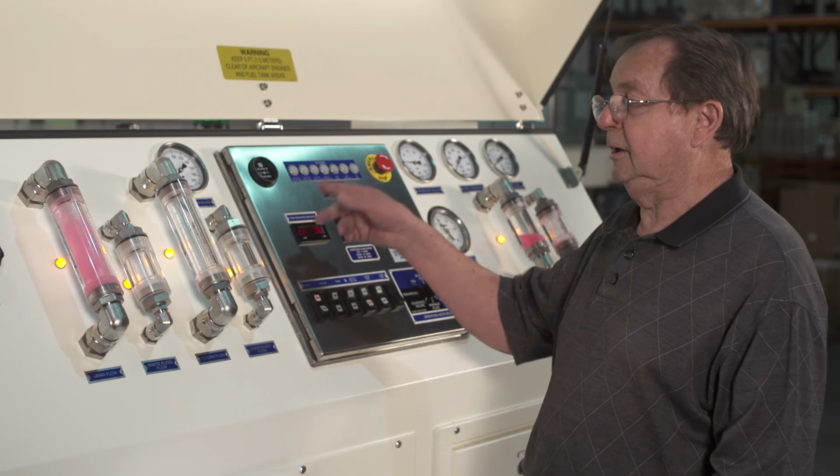I put it in the N2 purge mode, turn the mode switch on, and I push fluid out of the hose, and again you see the drain flow with the fluid coming out of the hose. You're in the waste mode, which is the default setting. So the fluid that I'm pushing out of there, again in a purge mode or drain mode, goes back into the waste tank, not in the clean.

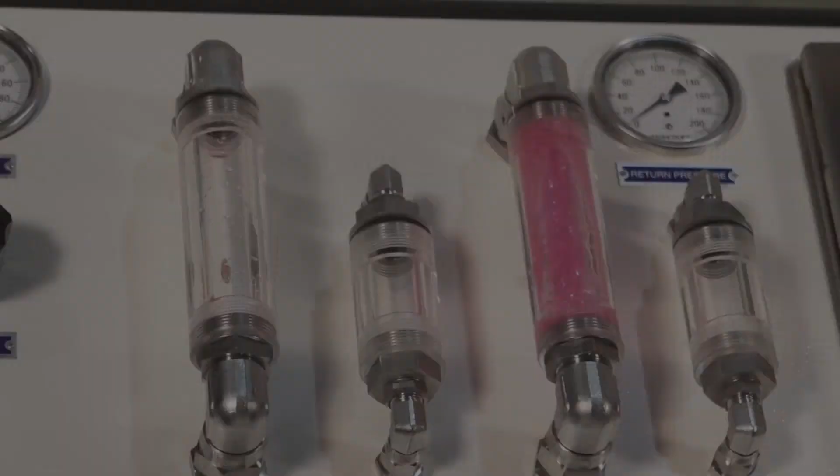That fairly well cleans out most of the fluid in the line, so I turn this switch off, reduce my regulator, the nitrogen, and that basically shows you filling and purging using the cart. There are 4 calibration verification procedures for the coolant service cart: the pressure gauges, the temperature gauge, the pressure switch behind this panel, and the flow meter verification tool.

For preventive maintenance on the coolant service cart, there are various procedures that are recommended. For each day of operation, on the vacuum pump, drain the trap if it's more than half full. Check the frame structure, fittings, fasteners, struts, and then tighten them as necessary. Visually inspect the coolant system components, valves, fittings, hoses, tighten or replace any leaking fittings or gaskets.

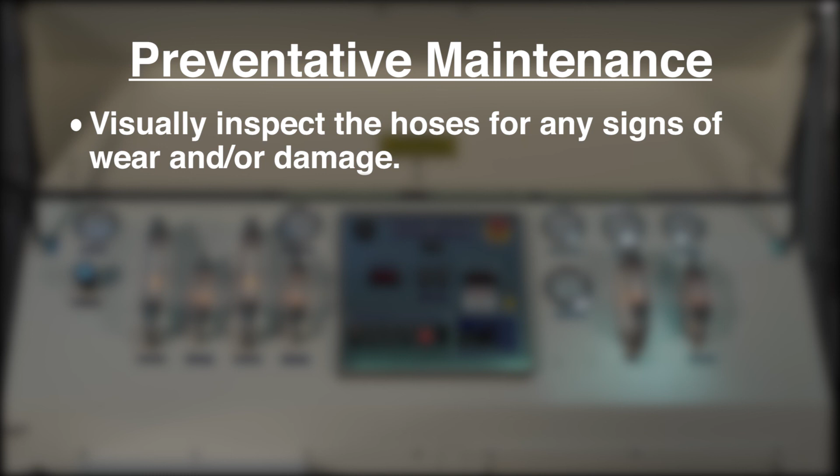Check the power cord for any damage, fraying, and replace as necessary. Visually inspect the hoses for signs of wear or damage. Check the parking brake and make sure that the brake locks are adjusted and repair as necessary. Check the instrument lamps through the lamp test button and check and replace any switches or lamps that aren't illuminated.

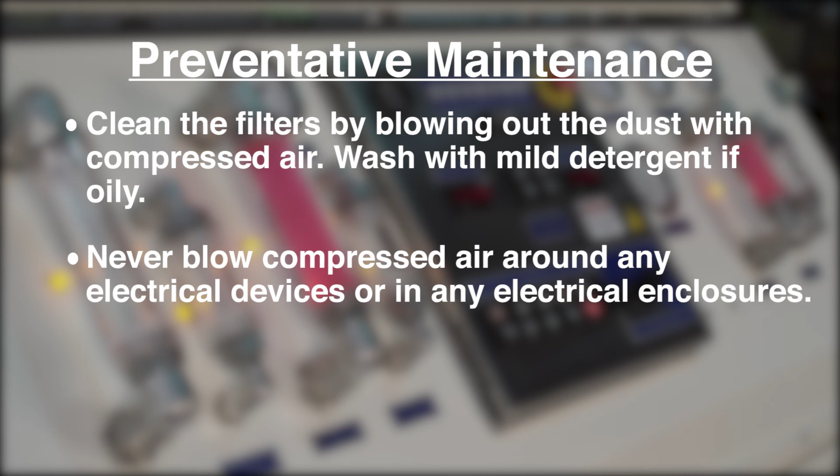Annually, inspect the wiring. Visually inspect the electrical enclosure for loose wires, connections. Check all power terminals and screws for tightness. Annually, check and tighten all screws or wire terminals. Annually, inspect the electrical enclosure vents. Remove and inspect the 2 vent filters inside the power enclosure louvers. Clean the filters by blowing out the dust with compressed air, or wash with mild detergent if oily. Never blow compressed air around any electrical devices or in any electrical enclosures.

Cabinet frame. Clean exterior surfaces. Use mild soap with a sponge or soft cloth. Do not use abrasive cleaners. And remove all cleaning agent residue. Cabinet interior and drip pan. Remove debris from inside the cart enclosure using a vacuum cleaner. Wipe the drip pan clean. Steering mechanism, lubricate. Parking brake, lubricate. Wheel bearings, lubricate only when necessary, if rarely towed. Calibrate the gauges, as we've just discussed about annual calibration procedures.